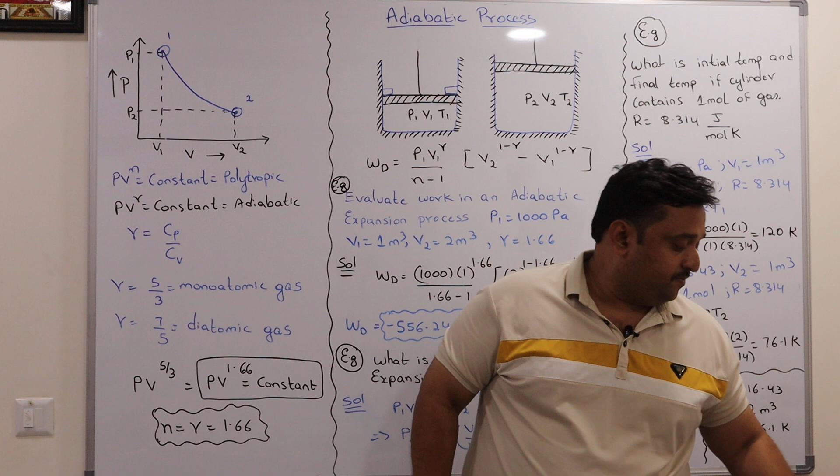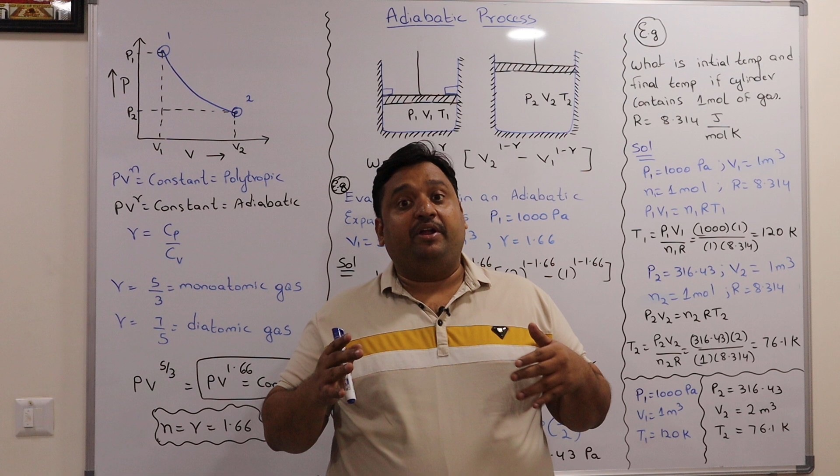In the last class, we discussed the polytropic process. Today, let us concentrate on the adiabatic process, which is a special case of the polytropic process. You need to understand the adiabatic process well, so that in future when we apply it to many different cases, you can distinguish its importance.

Before I start, let us see these two diagrams. There is a piston and cylinder, and I have drawn some dashed lines over the cylinder. This is called insulation. The reason for insulation is that no heat can enter into this system before the process, because we are taking the system from state 1 to state 2 without putting any heat into the system.

So why does anything get expand? If you see state 1 to state 2, expansion happens. What is the reason for this expansion? Have you ever thought about it? If you supply some amount of heat to the system, the internal energy rises, and this internal energy converts into expansion work. But in the adiabatic process, we don't supply any heat to the system. So why does the expansion happen? Because the system already has sufficient internal energy.

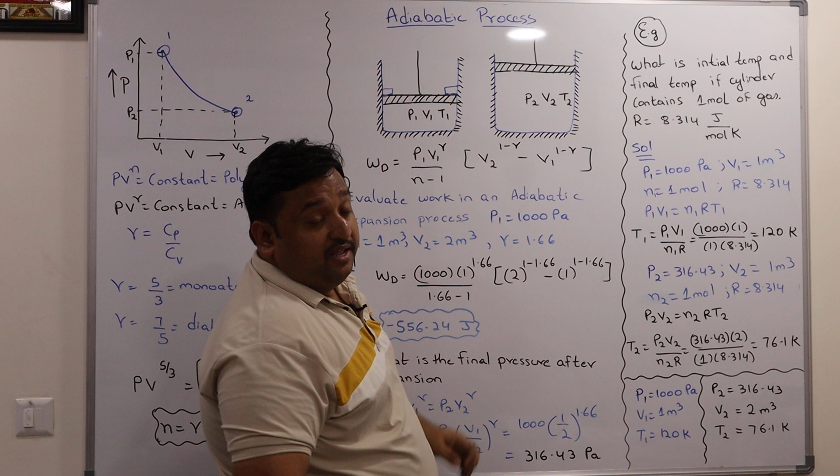Because of this energy, you can see - if the system has some P1, V1 and T1, that is pressure, volume and temperature - and there are stoppers, or latches. If I remove these stoppers, it will get expand. Why will it expand? Because it has some energy inside it, in the form of internal energy. This internal energy will cause some expansion work. That is the beauty of the adiabatic process: without supplying any heat, the energy contained within the system has caused expansion.

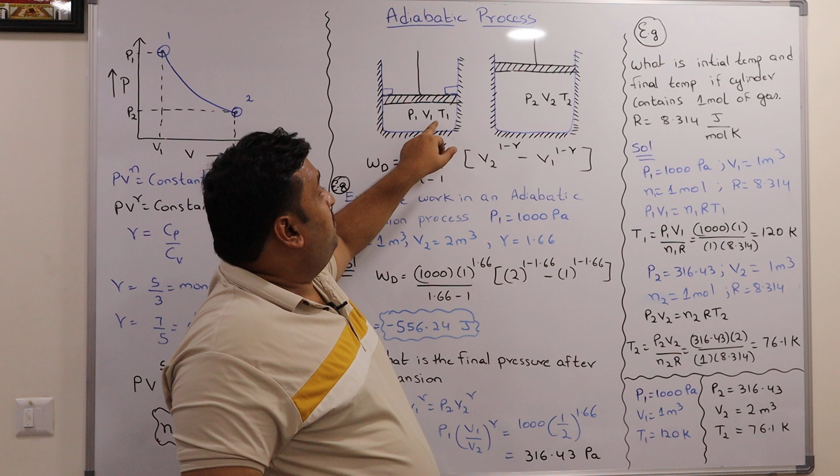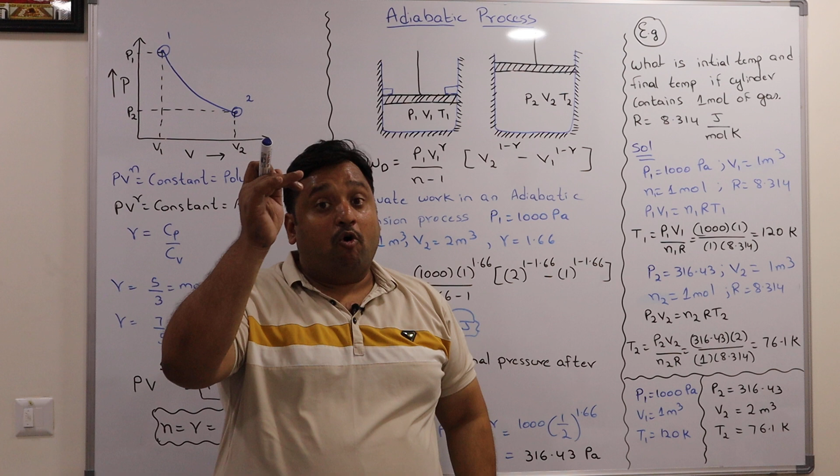At what cost does this happen? Generally, you can measure internal energy based on the temperature of the system. You can see P1 is the pressure, V1 is the volume, and T1 is the temperature. After the expansion, we have P2, V2 and T2. Because it has expended some energy for this expansion, the system will lose temperature as it goes from state 1 to state 2. That means the temperature at state 1 will always be higher, and the temperature at state 2 will always be lower. Why is it lower? That means some energy has been spent in the expansion process, because as you know, the first law states that energy remains constant.

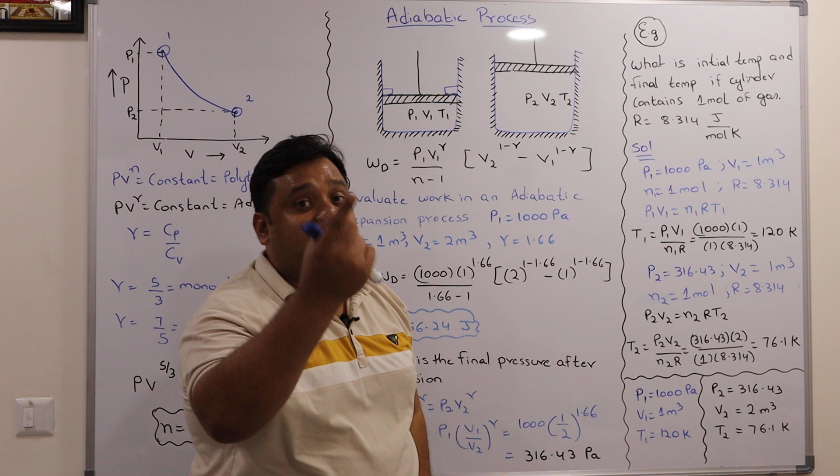And if it is expanded, at what cost has it expanded? It is losing some internal energy in the form of work. That is the beauty of the adiabatic process. So let us come back to the board. I am taking the system from state 1 to state 2, which is an expansion process. It has followed some path, and this path is called the adiabatic path.

You can see, in the last class we discussed that for a polytropic process, PV power n equals constant. If you take it as an adiabatic case, n becomes gamma, so PV power gamma equals constant. What is this gamma? For the special case of ideal gas conditions, you can calculate gamma as Cp by Cv, that is specific heat capacity at constant pressure divided by specific heat capacity at constant volume. If you know the Cp and Cv of that particular ideal gas, then the ratio between these two gives you the gamma.

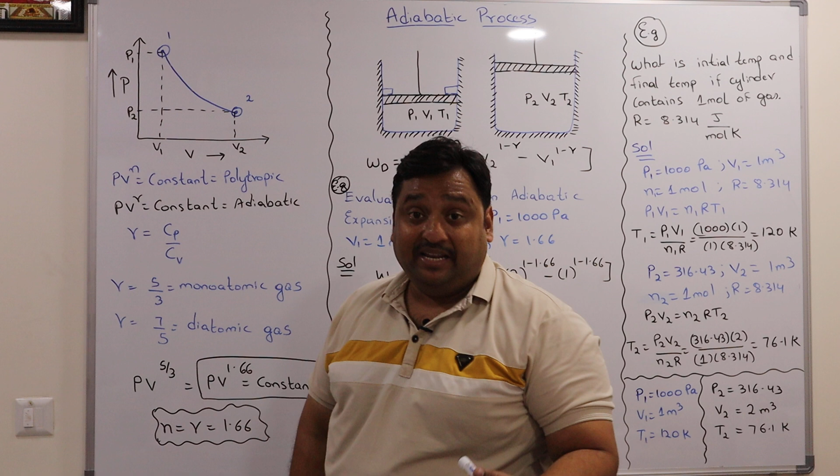Based on research, gamma equals 5 by 3 for monoatomic gas and gamma equals 7 by 5 for diatomic gas. If you consider only monoatomic gas, PV power gamma means gamma is equal to 5 by 3, that means PV power 1.66 equals constant. So the polytropic process equals gamma at this special case of 1.66 for monoatomic gas.

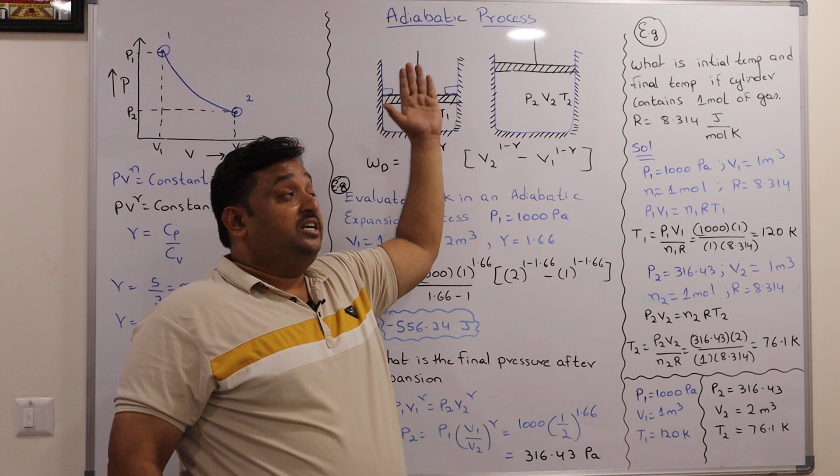So let us apply the formula in calculating the displacement work and temperatures: initial temperature, initial pressure, initial volume, and final temperature, final pressure, and final volume.

Displacement work is equal to P1 V1 per gamma by gamma minus 1, because now it is an adiabatic process, into V2 power 1 minus gamma minus V1 power 1 minus gamma. How this equation was derived, if you go to my earlier lecture, I have shown how I got this formula. So using this formula, let us calculate the displacement work in this expansion process done adiabatically.

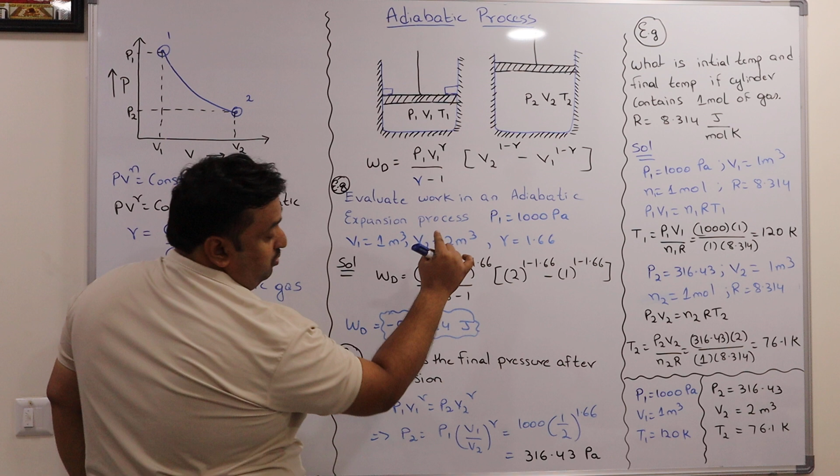Here P1 is given as 1000 Pascal, V1 is 1 meter cube, V2 is 2 meter cube, and gamma is 1.66. If you substitute each value in this formula, you get displacement work as minus 556.24 joules. This is an expansion process, meaning the system has done work to the surroundings, that's why you get a minus symbol. So this is the work spent.

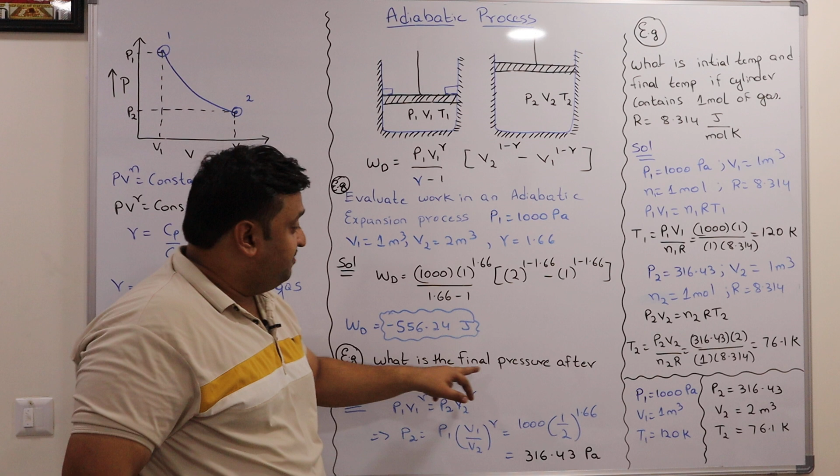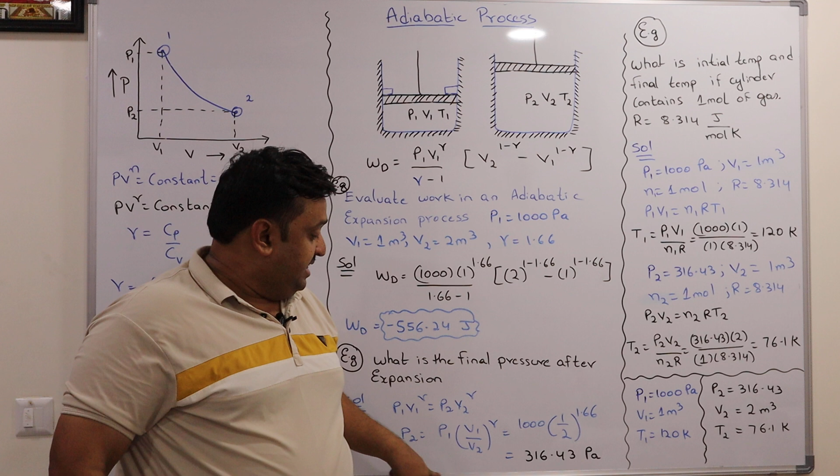What is the final pressure? I use this formula: P1 V1 per gamma equal to P2 V2 per gamma, because it's an adiabatic process. From this, P2 equals P1 into V1 by V2 per gamma. If I put in all the values, the final pressure is equal to 316.43 pascals. So if the initial pressure is 1000 pascals, the final pressure is 316.43 pascals.

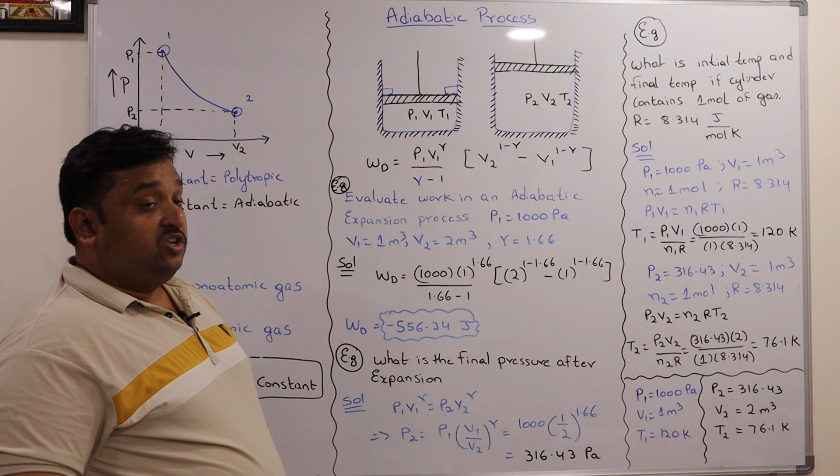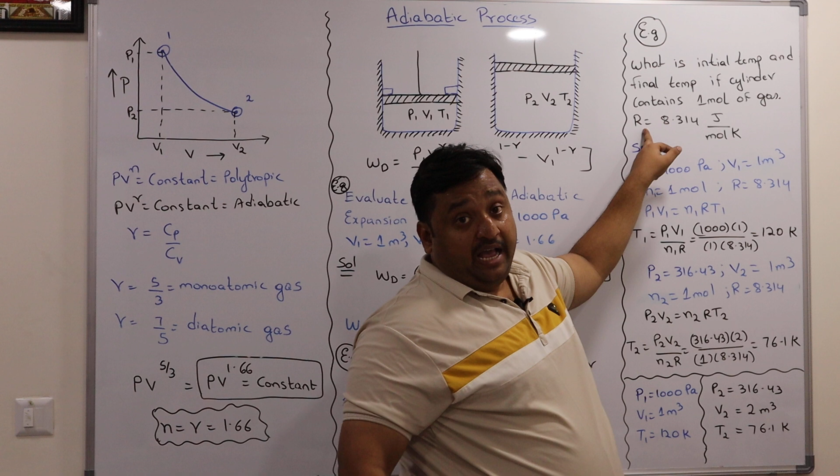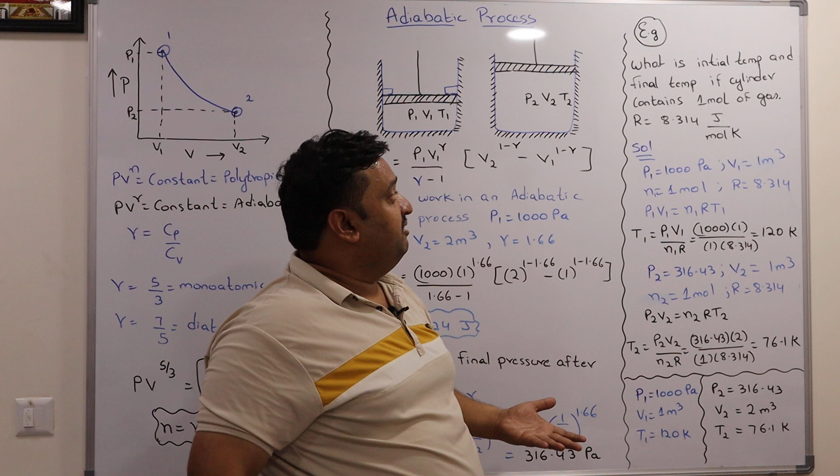So now I have all the information: P1, V1, P2, V2. Let us calculate T1 and T2. What is the initial temperature and final temperature if the cylinder contains 1 mole of gas and the universal gas constant value is 8.314 joule per mole Kelvin? That means inside this, 1 mole of gas is there, and after expansion also 1 mole of gas will be there. If that is the case, what is my T1 and T2 during this expansion process?

I know P1, V1, and N1 number of moles are constant. Because this is a special case of ideal gas, I can use the ideal gas law: P1 V1 is equal to N1 R T1. From this, T1 is equal to P1 V1 by N1 into R. If I substitute all the values, I get 120 Kelvin. That means the temperature before expansion is 120 Kelvin.

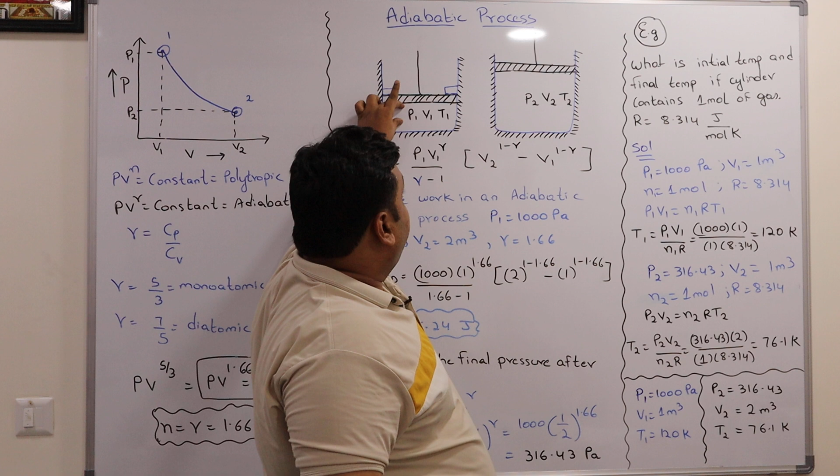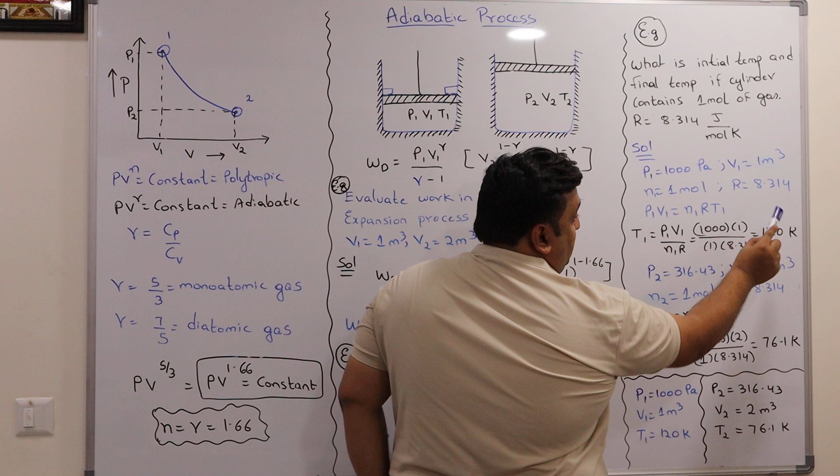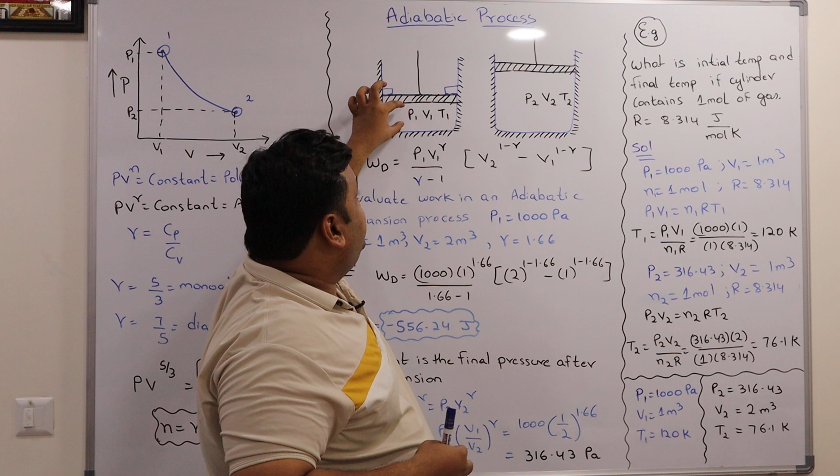Similarly, I know P2, V2, N2 and R. If I again apply the ideal gas law, I get the temperature equal to 76.1 Kelvin. You can see T1 is 120 Kelvin, T2 is 76 Kelvin, because the temperature has dropped due to this expansion. Why? Some of the energy contained in the system has been lost to the surroundings in the form of work. That is why the initial temperature of 120 is higher than T2, which is 76.1 Kelvin. So I have tabulated the values P1, V1, T1, P2, V2, T2.

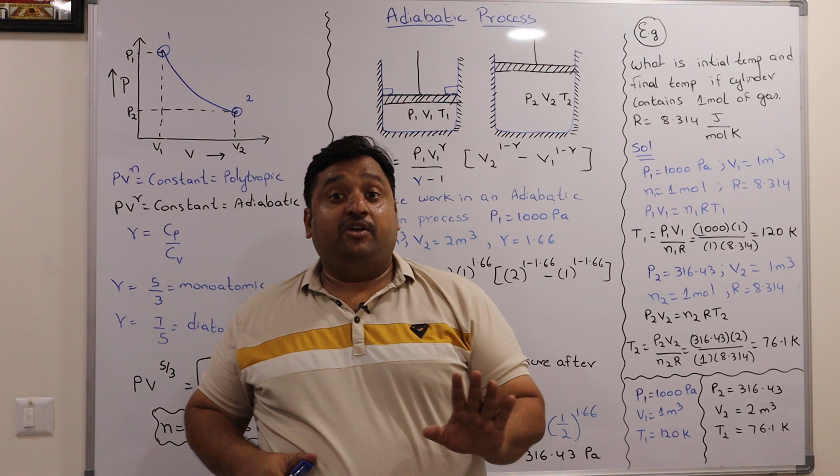I hope now you understand what is the adiabatic process, and you have to digest the concept of adiabatic systems, because we are going to apply this in future to more concepts. Thank you very much, I will come back with a new lecture.